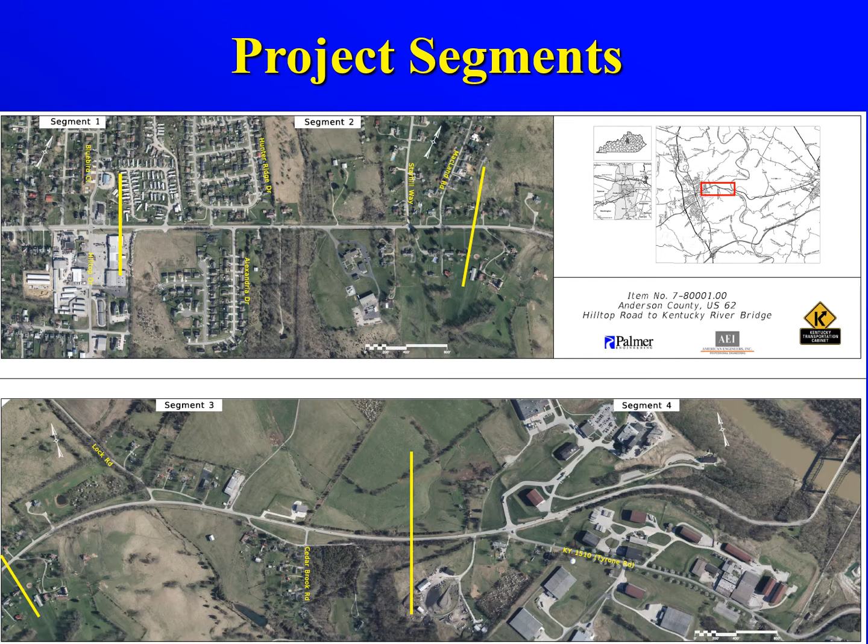The corridor is broken into 4 segments to view it in greater detail with varying alternatives for improvement within each segment. Segment 1 is at Hilltop Drive intersection. Segment 2 begins just east of Hilltop Drive and continues to MacLand Drive. Segment 3 begins east of MacLand Drive and ends west of Kentucky 1510 or Tyrone Road. Segment 4 begins at Kentucky 1510 and ends at the west end of the bridge over the Kentucky River.

This section of US 62 is functionally classified as a rural major collector, connecting Lawrenceburg to Versailles and beyond. It is one of only 2 routes that cross the Kentucky River into Anderson County, the other route being the Bluegrass Parkway. Currently, portions of the route are characterized by little to no shoulders and inadequate sight distance.

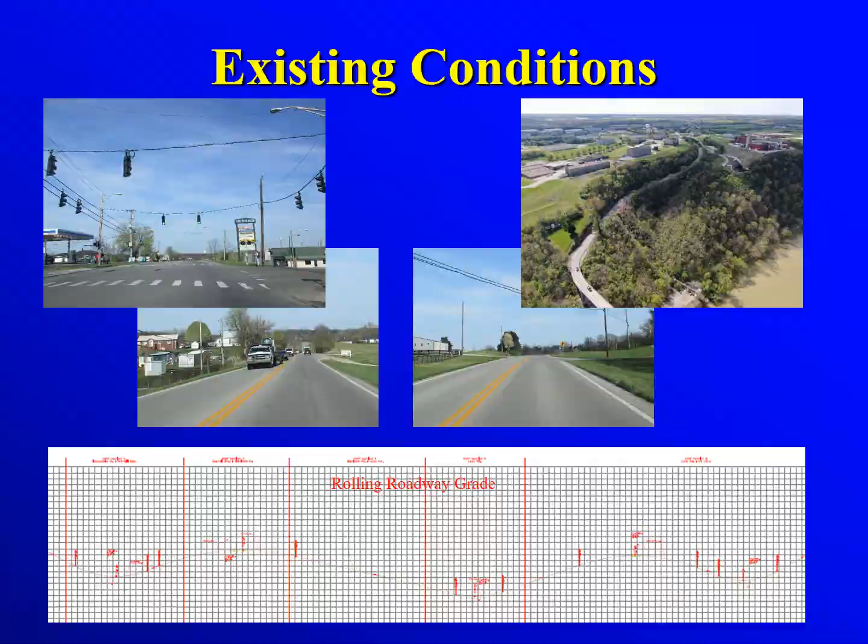At the beginning of each roadway project, the Transportation Cabinet creates a purpose and needs statement to clearly identify why the project is needed and the objectives that will be important to address with any improvement.

The purpose of the project is to improve the safety and mobility on US 62 from Hilltop Drive to the west end of the bridge over the Kentucky River, while maintaining driver expectancy and minimizing the impacts on the surrounding environment. The project corridor has been the scene of several collisions over the past 5 years, including 3 fatalities.

In addition to routine commuters, the highway is also traveled by tourists to the Wild Turkey Distillery who may not be familiar with the area. The traffic for this portion of US 62 is expected to increase from the current 5,200 vehicles per day to 5,800 vehicles per day by 2040, with 10% of the traffic being trucks.

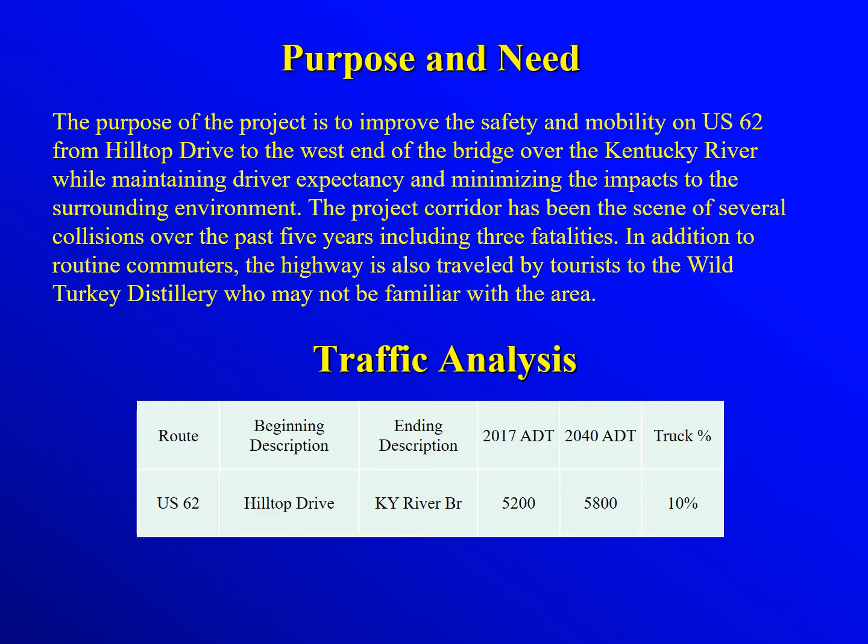An environmental study is done for each project to determine the environmental impacts the new construction might have. This can include impacting endangered species, encountering hazardous materials, affecting potential historic properties, encroaching on public property such as parks, and more. Initial investigations for this project have not revealed any environmental issues or concerns that would prevent any of the alternatives from moving forward.

After the final alternatives are preliminarily identified, traffic noise analysis and archaeological studies will be completed.

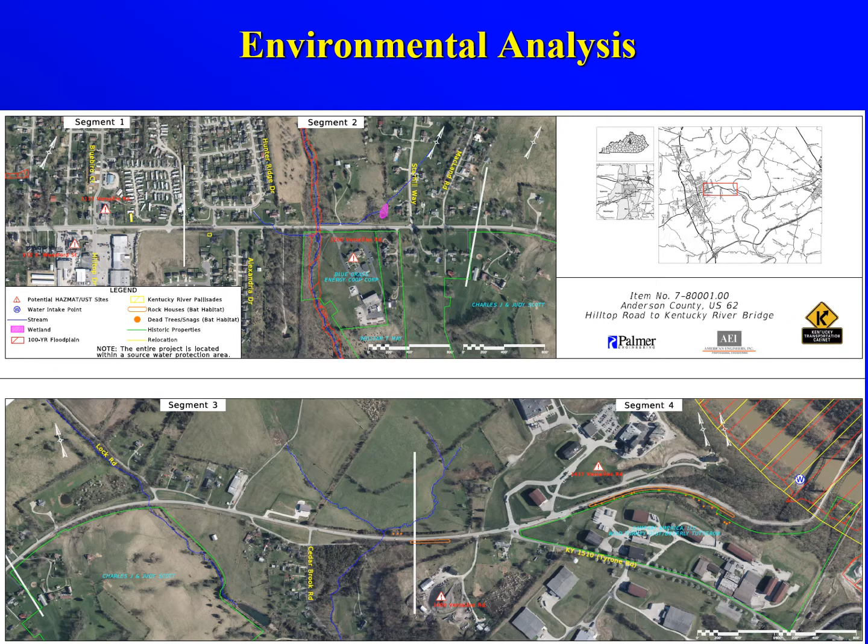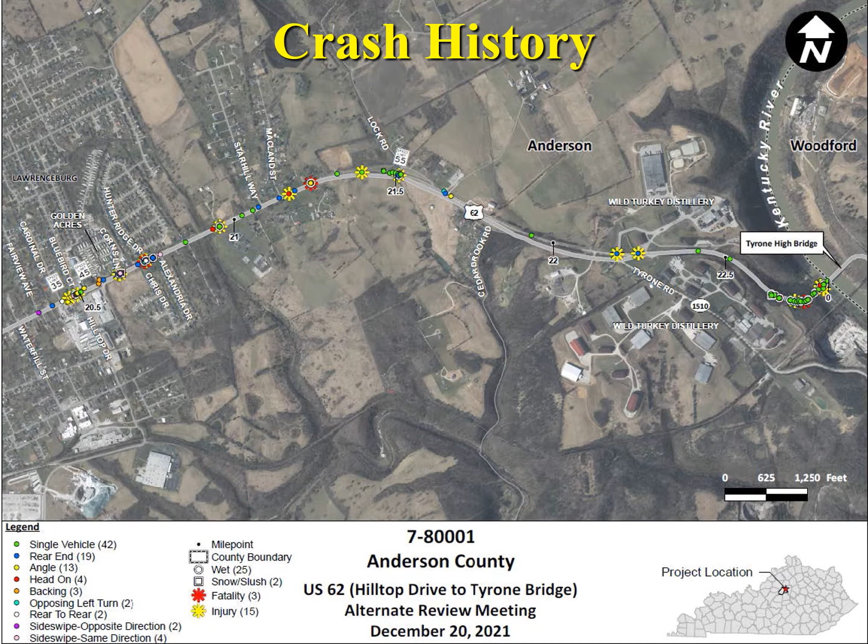From 2016 to 2021, a total of 77 crashes were reported from Hilltop Drive to the Kentucky River Bridge. 45 crashes were reported from Hilltop Drive to Macklin Drive, including 17 rear ends, 10 angle, and 2 fatalities. 12 crashes were reported from Macklin to Kentucky 1510; most of these were single vehicle crashes. 20 single vehicle crashes occurred on the hill near the Kentucky River Bridge.

In addition to the no-build alternative, 2 construction alternatives have been considered for the project. Alternative 1 is the minor widening of the existing 2-lane highway that would involve a series of low-cost intersection, roadway departure, and turn lane safety improvements along the length of the corridor. The 2 roadway designs that may be used in Alternative 1 are the 2-lane rural minor improvement design section and...

The 2-lane rural minor improvement design section includes 2 12-foot lanes, 4-foot shoulders with 2 feet paved, and a 4-foot ditch. The 3-lane rural minor improvement design section is similar to the 2-lane rural design section, but with an added 12-foot center turn lane.

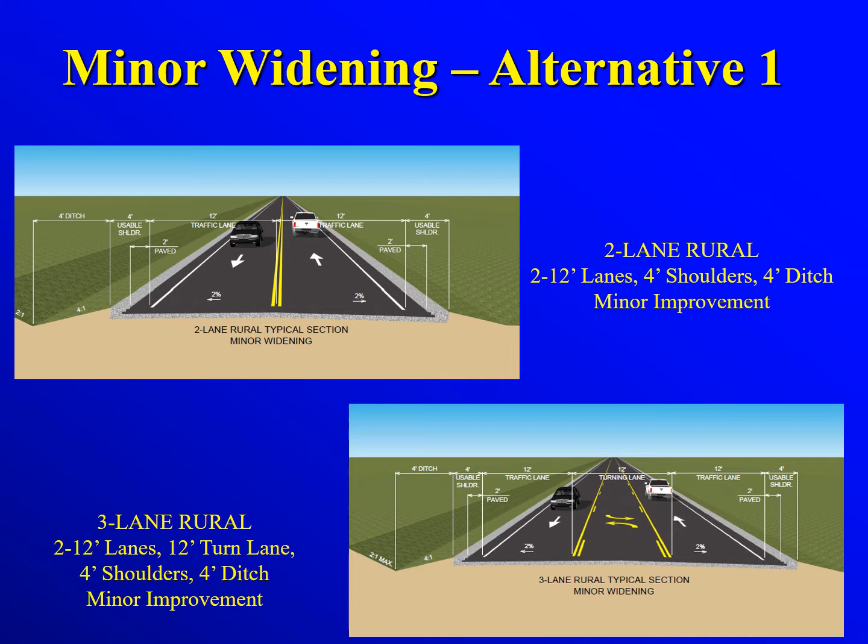Alternative 2 is the more extensive widening improvement that would involve intersection modifications at Hilltop Drive, including a roundabout option, a 3-lane design section between Hilltop Drive and Alexandria Drive, shoulder widening, and intersection turn lane improvements between Alexandria Drive and Tyrone Road, and addressing a deficient horizontal curvature in the western approach to the Kentucky River Bridge.

The roadway designs that may be used in Alternative 2 are: the 2-lane rural design section includes 2 12-foot lanes, 8-foot shoulders with 6 feet paved, and a 12-foot ditch. The 3-lane rural design section is similar but adds a 14-foot center turn lane. The 3-lane urban design section uses the same lane widths and center turn lane with a curb, gutter, and a 5-foot sidewalk on both sides of the highway.

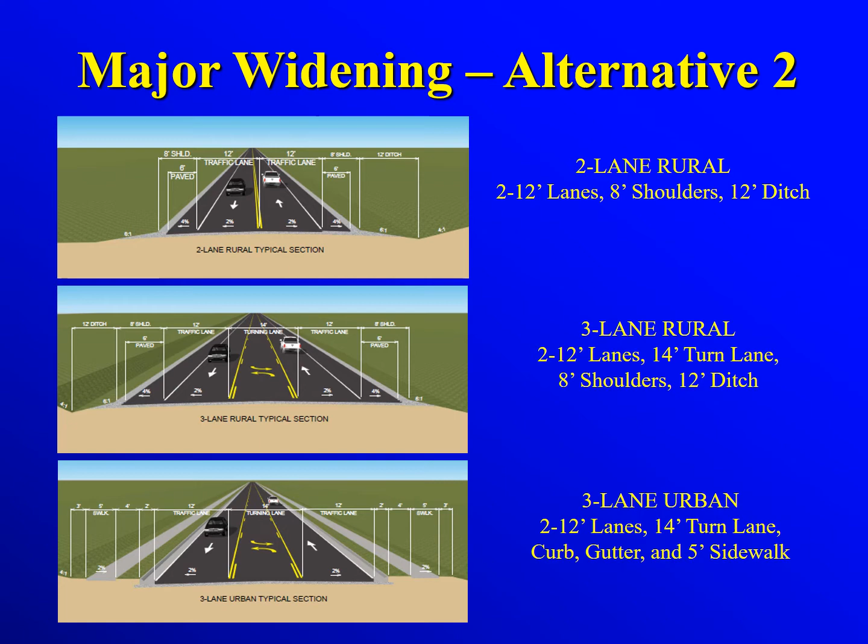Please know that the following few slides will contain several maps and graphics that may be hard to see in detail. They are available for separate viewing by using links on this website.

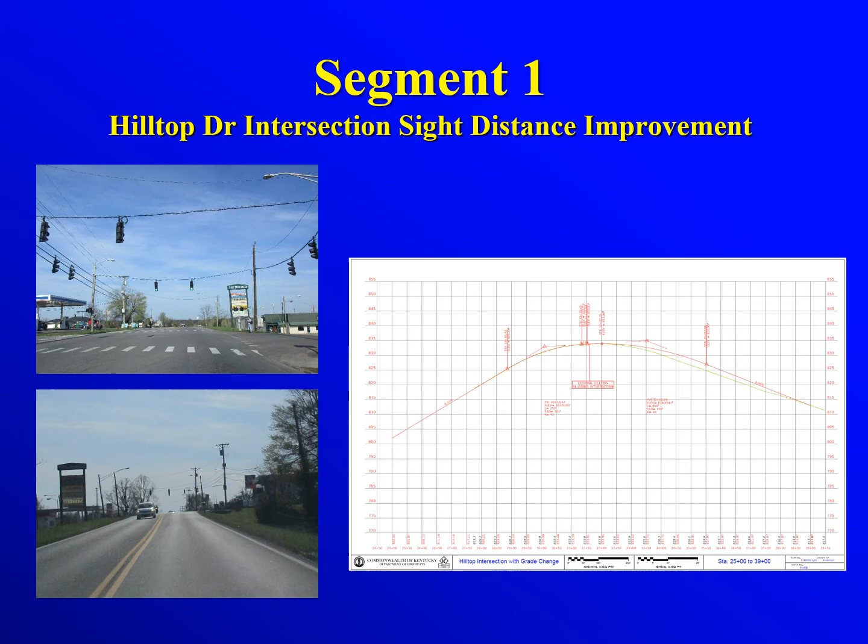In Segment 1, US 62 is proposed to be raised approximately 2 feet on the east side of Hilltop Drive intersection to improve sight distance with all of the alternatives. The proposed alternatives can also be constructed as a standalone project or as part of the proposed improvements to widen US 62 to 3 lanes in Segment 2.

Alternative 1 is shown in white on the exhibits. Along with raising the grade at Hilltop Drive intersection, minor improvements would be made to the westbound left turn, adding additional signal heads and installing reflective backplates, and adding safety features for pedestrians. Improvements to signal timing and access management are also being considered. The cost for making this improvement is estimated at $330,000 for construction. Alternative 1 potentially impacts 5 properties.

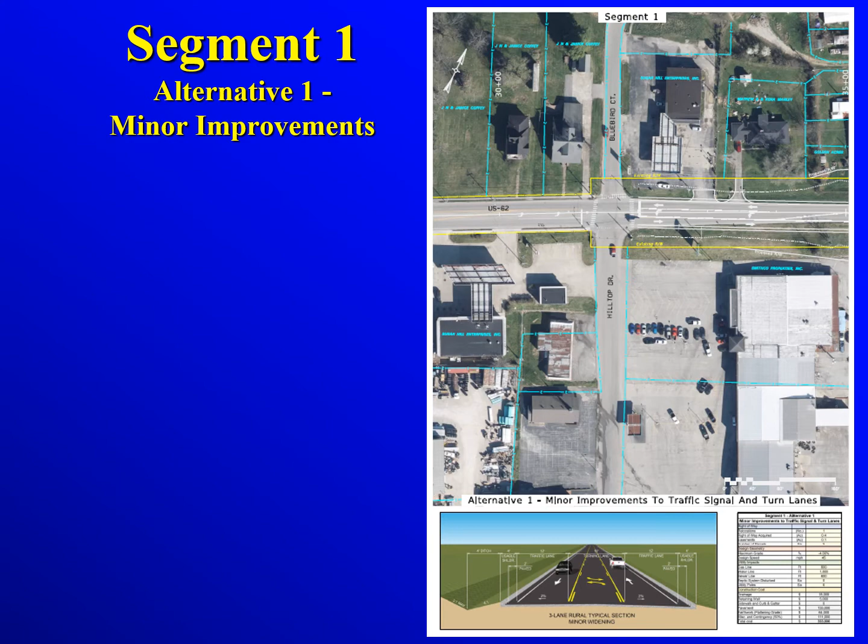Alternative 2A, shown in red, involves lengthening the left turn lanes at the Hilltop Drive intersection with a 3-lane urban design section and raising the grade east of the intersection. Right turn lanes are also proposed to be constructed from eastbound US 62 to Hilltop Drive and westbound US 62 to Bluebird Court. Alternative 2A is the most expensive of the alternatives, with an estimated construction cost of $1,293,000. The alternative also impacts 20 properties.

While Alternative 2A affects a more significant number of properties, most of the impacts are minor for reconstructing the existing sidewalks east of the intersection.

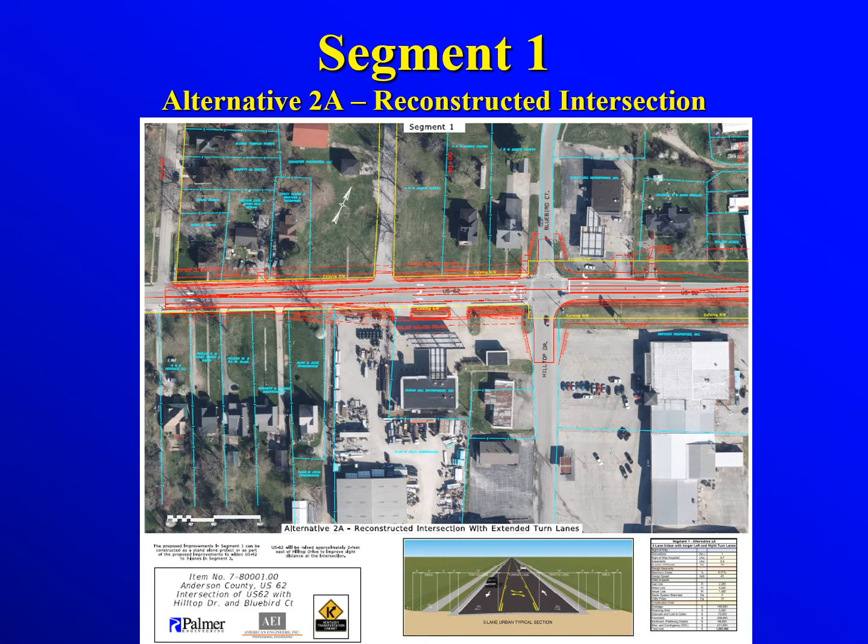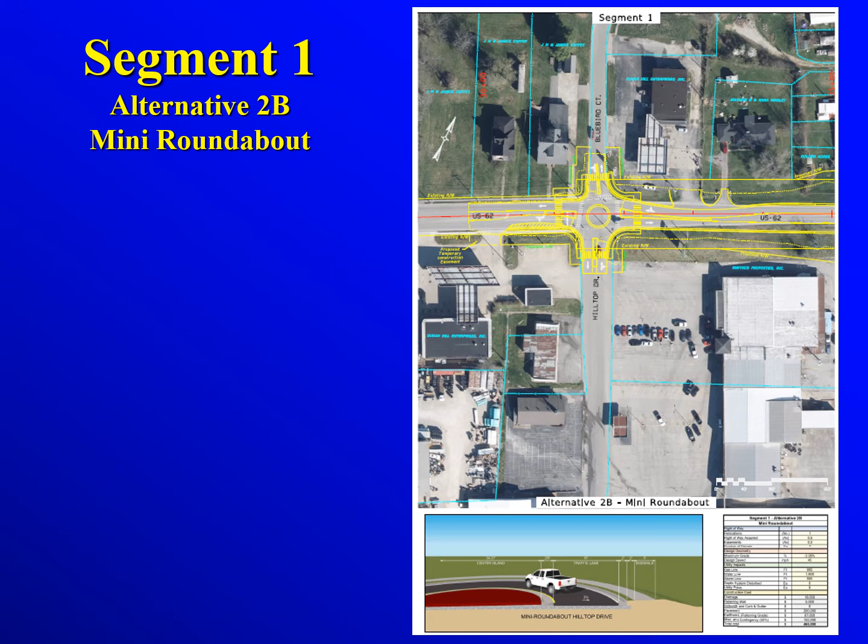Alternative 2B, shown in yellow, involves reconstructing the Hilltop Drive intersection with a mini roundabout that ties into a 3-lane urban design section just east of the intersection. Mini roundabouts operate almost identically to a regular single-lane roundabout. The only difference is that the physical central island is replaced with a smaller mountable island. The proposed roundabout would eliminate the existing traffic signal. Alternative 2B has an estimated construction cost of $465,000 and affects 7 properties.

Segment 2 begins just east of Hilltop Drive and continues to MacLand Drive. Alternative 1 in white is a minor widening of US 62 to 3 lanes rural from Hilltop Drive to Alexandria Drive and then 2 lanes to MacLand Drive. Left turn lanes are also planned for Alexandria Drive, Starhill Way, and MacLand Drive. The cost for making this improvement would be $2.4 million for construction. Alternative 1 potentially impacts 14 properties, including 1 relocation in Corn Golden Acres Trailer Park.

Alternatives 2A and 2B are major widening options. Both are proposed to shift the alignment to the south side of US 62 and flatten the hillcrest east of the Hilltop Drive intersection. Both alternatives also propose to widen US 62 with a 3-lane urban design section from Hilltop Drive to Alexandria Drive. The primary difference between the alternatives is ending the sidewalks at Alexandria Drive or continuing the sidewalks to MacLand Drive. Both alternatives affect 21 properties, including 1 relocation in the trailer park.

Alternative 2A in red proposes to widen US 62 to 3 lanes with curb, gutter, and sidewalks ending at MacLand Drive. The cost for making this improvement is estimated at $3.655 million for construction. Alternative 2B in green proposes to widen US 62 to 3 lanes with curb, gutter, and sidewalks to Alexandria Drive, and then continue with widening to 3 lanes with shoulders, no sidewalks from Alexandria Drive to MacLand Drive. The cost for making this improvement is estimated at $3.253 million for construction.

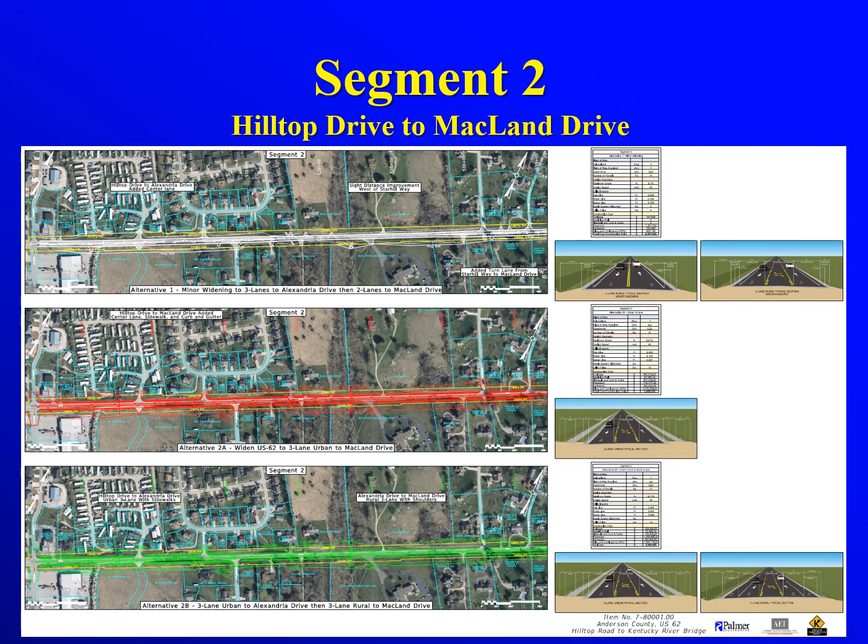Segment 3 begins east of MacLand Drive and ends west of Kentucky 1510 or Tyrone Road. Alternative 1 in white involves minor widening of the existing 2-lane with a left turn lane at Lock Road. The cost for making this improvement is estimated at $4.342 million for construction and potentially affects 12 properties with no relocations. Alternative 2 in red would widen US 62 to a 3-lane rural with a left turn lane at Lock Road. Then minor widening of the existing 2-lane would be done from Lock Road to Kentucky 1510. The cost for making this improvement is estimated at $4.205 million for construction and potentially affects 18 properties with no relocations.

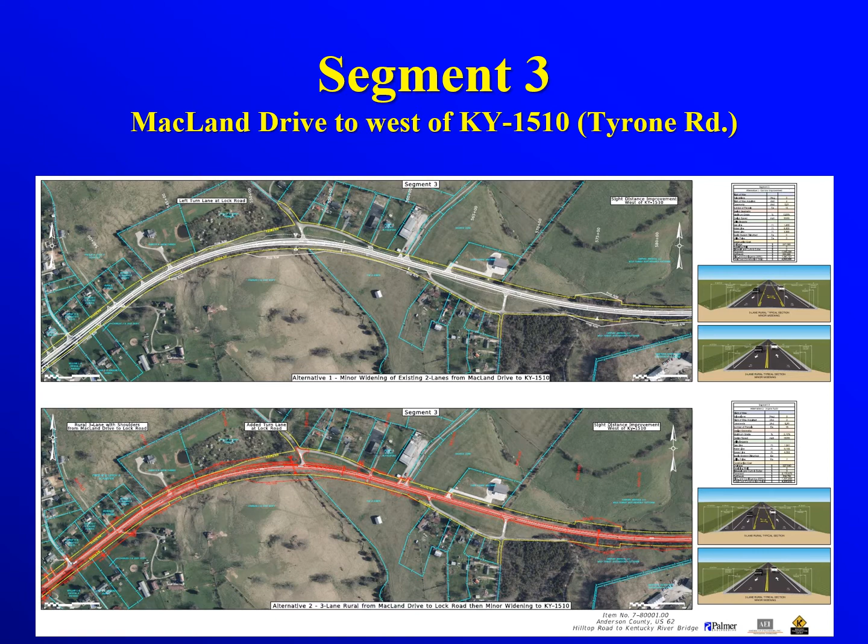Segment 4 begins west of Kentucky 1510 and ends at the west end of the bridge over the Kentucky River. Alternative 1 in white continues the minor widening of US 62 to a 2-lane rural design section with 4-foot shoulders. The north edge of the shoulder is maintained and all the widening would occur on the south side. The proposed widening would also include improvements to the existing ditching and the rock cut from the top of the hill to the Kentucky River Bridge. The cost for making this improvement is estimated at $1.804 million for construction and potentially affects 4 properties with no relocations.

Alternative 2 in red widens US 62 to the full 2-lane rural section with a left turn lane and sight distance improvements at Kentucky 1510 and Wild Turkey Distillery intersection. It also includes reconstructing the curves approaching the Kentucky River Bridge by shifting the highway into the hill on the south side. The cost for making this improvement is estimated at $4.294 million for construction and potentially affects 5 properties with no relocations.

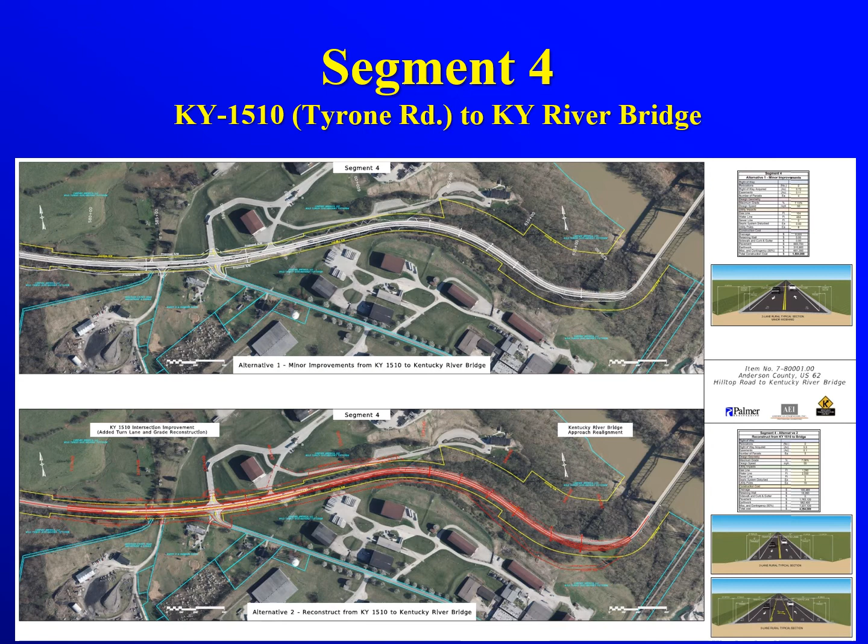The current 6-year highway plan developed by the Cabinet and Legislature has $3.83 million for the right-of-way acquisition in the fiscal year 2023, $4.5 million for utility relocation in the fiscal year 2023, and $13.75 million for construction in fiscal year 2024. After this meeting, the design team will continue collecting information with the intent of identifying the preferred alternative later this year. Right-of-way plans will be submitted and the appraisal and acquisition process will begin in late 2023 or early 2024. Utility relocation work will likely start in late 2024, with roadway construction occurring from 2024 to 2026.

At the in-person meeting, 2 forms were provided to those who attended. One was a brochure with a brief explanation of the project and some graphics that have been included in this presentation. Another form was a questionnaire where we asked for feedback and opinions on the alternatives and those preferred by the public for further consideration. Both of these forms are available as PDF downloads from this website. Please note the address and final date for sending it in by mail if you download and fill out the questionnaire. You can also use the interactive questionnaire and submit that electronically when completed. Please know that any information you provide will be kept confidential and you are not required to provide any information that makes you uncomfortable. Additional contact names, email addresses, and phone numbers are also provided if you need to reach us.